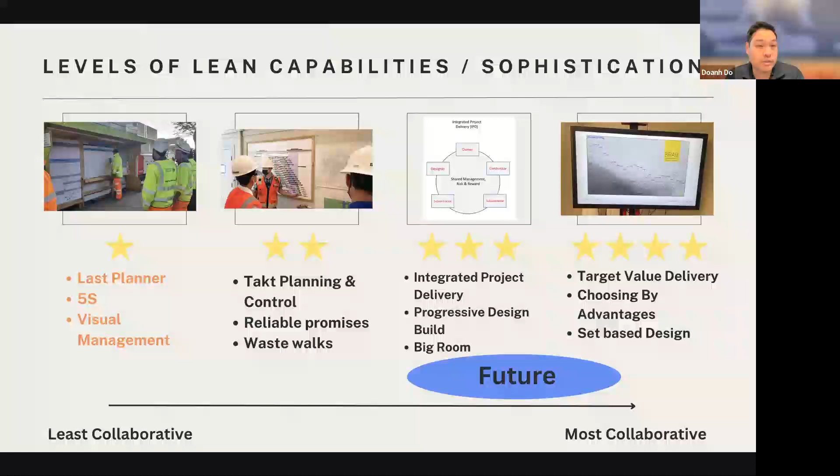And this is kind of the value of Last Planner System: bringing these areas that are not commonly used in other systems more up to the surface, and we'll talk about all these parts, right?

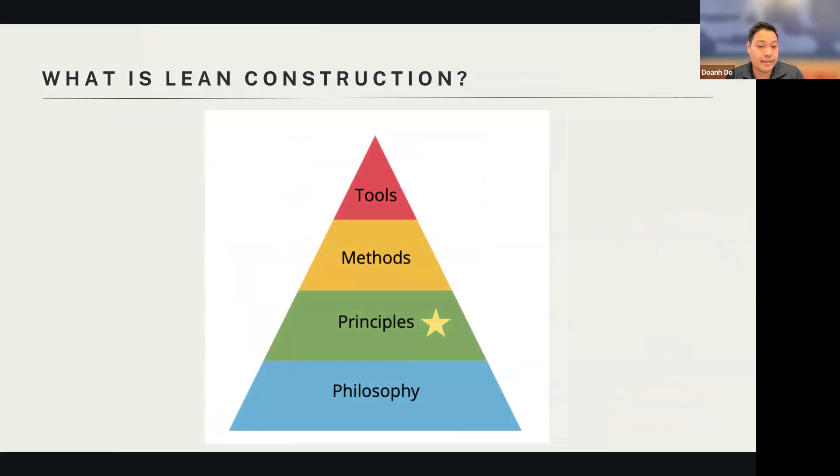So with lean construction, we really have layers, right? We have the philosophy, the principles, the methods, and the tools. Whenever I teach somebody a method or an idea about lean construction, I always start with the philosophies and principles. So today we're going to talk about the principles of the Last Planner System. From the principles, we're going to see how they connect to the methods and how we can apply this on projects.

So these are just good planning and scheduling principles. Again, I want to go over this. And the goal here is that let's see if we agree that these are ideas that we should implement on our projects. And from the agreement that we should be doing these things, this is actually how we connect them to the Last Planner System application. The first one is collaborative planning.

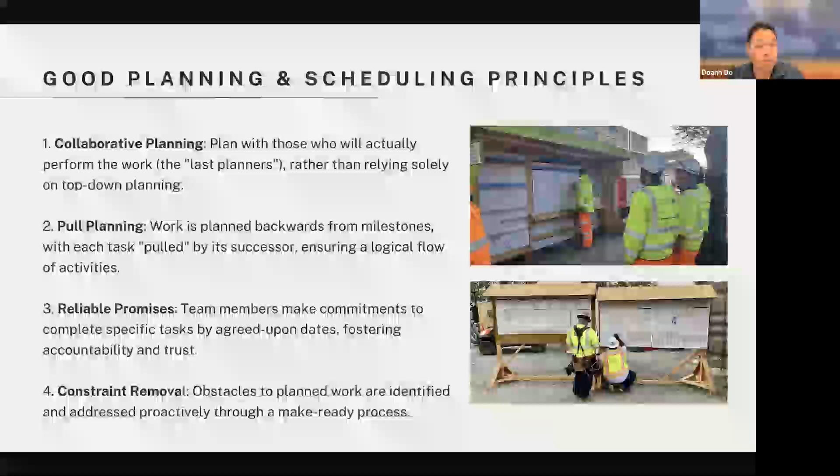Plan with those who will actually perform the work, the last planners, rather than relying solely on a top-down planning process or person. Number two, pull planning. So work is planned backwards from milestones. So we start with the milestones first, and then we pull from the milestones to create a logical set of activities. Three, reliable promises. You want your project team to make commitments to complete specific tasks by agreed upon dates, which creates a greater sense of accountability and trust.

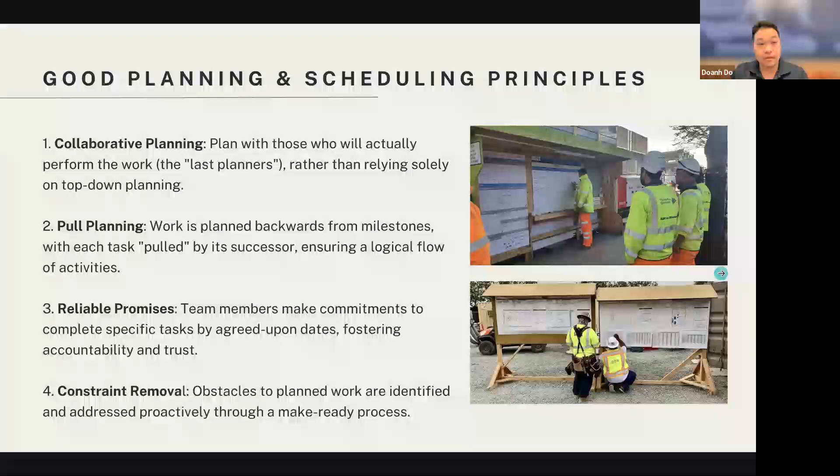Number four, constraint removal. Before you put work into the weekly work plan and the daily work plan, you want to remove obstacles for working on those tasks. So we want to address the obstacles and constraints before we put them on the weekly schedule. And this is done through a make ready process. So these are just four good planning and scheduling principles. Number five, continuous improvement. We want to get regular feedback and adapt the plan based on performance metrics and the feedback of how things are working.

Number six, we want to plan in greater detail as we approach the date that we're doing the work. So if your project task is a year away, you want to plan in less detail than if it's tomorrow or next month. So as you move close to the date of executing the work, you want to have greater details in your planning, because having a very precise plan for 2 years from now doesn't actually help you, because there will be a lot of changes between now and then.

Number seven is workflow reliability. We want to create a system that creates predictable and reliable and stable work throughout the process. By having stable work, we eliminate chaos and we make it so that people can focus on the right things. Number eight is transparency. We want to promote open communication and visibility of project progress amongst all team members. So we want to have one plan for the entire project. We don't want to have a secret plan for the general contractor, a secret plan for the trades, a secret plan for the owners. We want to have one plan, make it transparent, and communicate on that plan. Otherwise, we don't have the same information to work with each other on.

Number nine, decentralized decision making. Empower the frontline managers to make decisions about the specific work areas. Replan as necessary to adjust the plan to the realities of the unfolding future. And then finally, number 10 is that we need to understand that planning and scheduling are different things. A lot of people use the words interchangeably. And in this presentation, we will actually define what is planning, what's scheduling, and why they're different. And by having a more precise language, we actually can work better together.

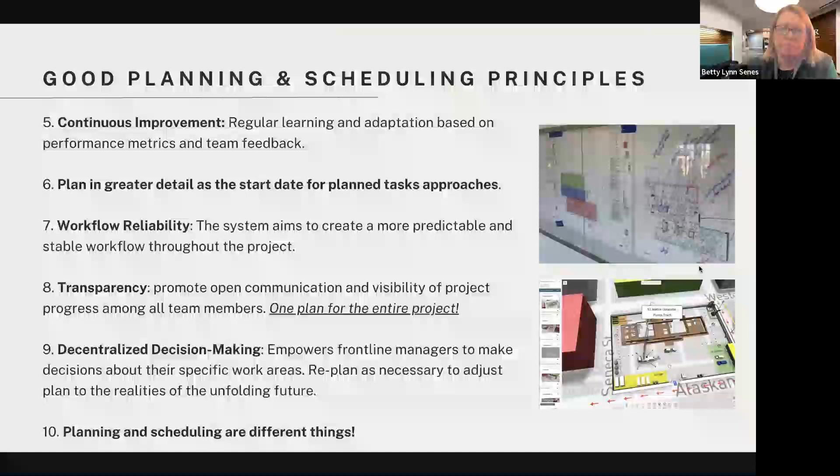So. Okay, great. And this does not require any particular project delivery method, and it does not require any level of sophistication. So all projects can use these 10 principles. And that's the goal of the Lean, is that we want to have ideas that can be used on small projects as well as large projects.

But how we apply that would change based on the project conditions, but we want to have a set of principles that we can use on all size projects.

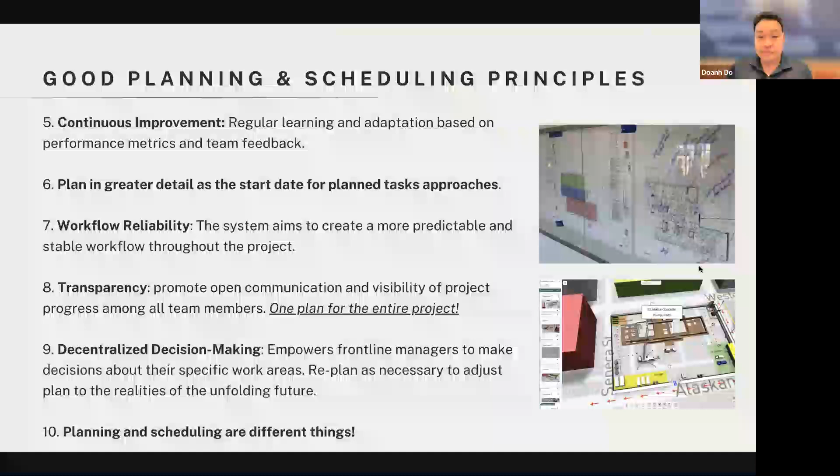So let's continue. So basically, the first important thing about Last Planner System is that we want to have the information visual. You want to make sure that you have the same information for everybody. So visual management is really about communicating who's doing what, where, and when. This allows every single person to see the work and be able to improve it. It allows us to identify risks and opportunities. And by having the information available already, we can actually have shorter meetings rather than longer meetings.

Humans are visual. We can see and process information faster when it's color-coded and visual. So just by making your information visual, you now have more people that can participate in the work. When it's not visual, there is a miscommunication in understanding what's going on. And also, people have a harder time understanding where they should be working every single day.

Logistics plan includes the site deliveries, laydown space, parking, routes that trucks take in and out of the projects. A lot of these things are on projects not visual or not even well planned. Therefore, there's chaos or miscommunication when these drivers come in and try to deliver materials. So laydown space means that you have to have space for every single crew that's working on a project, and it has to be labeled by the crew.

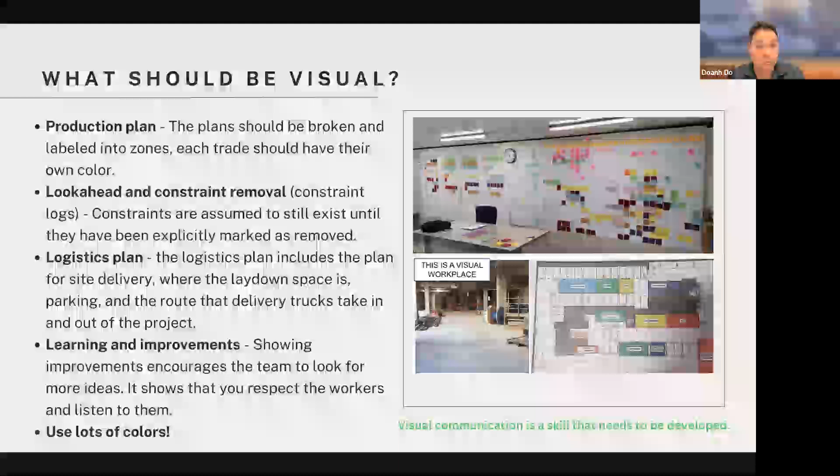We also want to make sure that the learning and improvements that we're doing is visual. So we want to show respect to the workers, that we're listening to them, and we're writing down what their ideas are and how we can implement those into projects. And we want to use colors because people like colors. And visual communication is a skill that we need to develop over time. So this is just an example of what can happen on a project. Each team will be slightly different, and we let the teams develop their own visual planning and visual communication based on how they want to use that information.

So daily huddles. So we talk about visual information and visual communication, right? That's where we keep the information about what we're working on. Daily huddles are what we do to communicate who's working on what, where, and when. So these are short 15-minute huddles in the beginning of the day. And the idea is that you want to have very focused questions, 60 to 120 seconds for each person, asking them what they're working on, where they're going to work, how many crews are going to be on site, what are their constraints, what materials are coming in, and what problems they foresee. These very short meetings allow us to have, instead of long meetings, a clear understanding about where and what's happening.

And we do the daily huddles in the exact same place where your visuals are, because you want to have all your information in a centralized location so that people clearly understand. And also you allow people in the morning to tell you about constraints and things that are coming up so that you have a plan and you are prepared for it during the day.

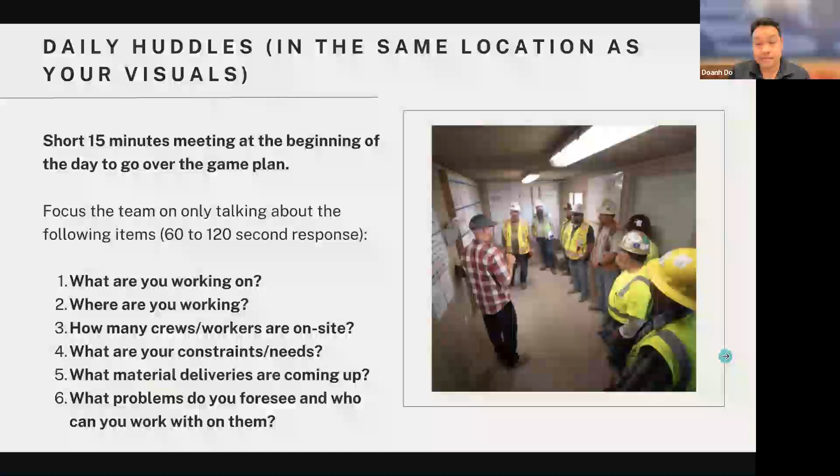Look ahead and make ready, right? So depending on the size of your projects, you'll look ahead maybe 3 weeks to 12 weeks in the future. And why do we have a look ahead? Because we want to understand what's happening and what's going to prevent us from doing the work and what's going to stop the work from being efficient and reliable. So these things could include equipment, labor, materials, prerequisite work, information, decisions, drawings, permits.

And really it's up to the superintendent and the project managers to understand what is happening in the next 3 to 12 weeks ahead of time. Otherwise, we reactively plan and we actually try to solve problems. With a look ahead and make ready process, we're proactively looking to the future and making sure that we are putting the things that we need in place before the work takes place.

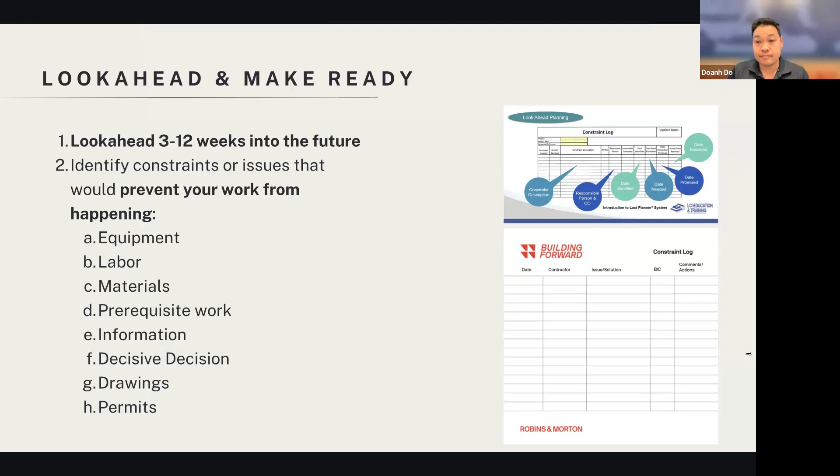Percent plan complete. So as we are putting the work that we're gonna do next week onto our production plan and schedule, we want to know, are we actually accomplishing what we're planning? And how many tasks we're planning versus how many we're completing? That gives us our PPC. In general, we want to have 100% PPC because we want to have reliable work. And nothing should be put on the weekly work plan until the constraint has been removed.

And when there is a low PPC or there's an issue with the work, we want to understand why it happens. So Glenn Ballard, when he first started studying last planner system, he looked at PPC and he found out that PPC is correlated with the productivity of projects. And on average, most projects actually have a PPC of about 54%. So you go to any random project throughout the world, your PPC on average is actually 54%.

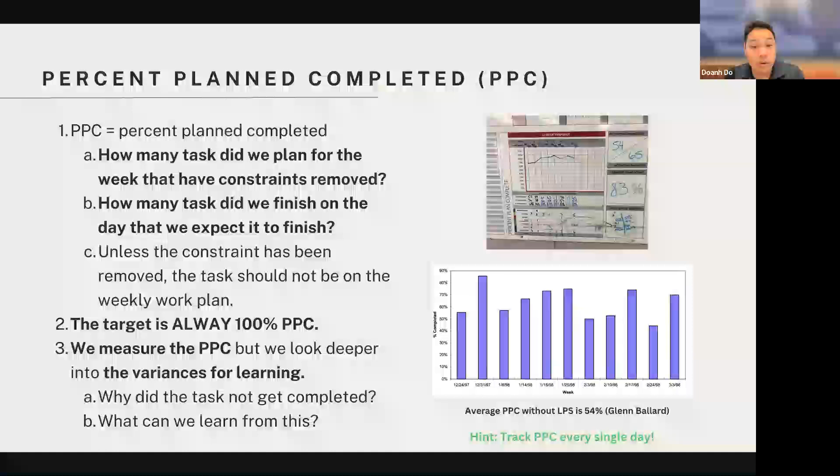And as we increase PPC, we improve productivity, we improve flow of the work, and we actually get higher safety. So the target of PPC is always 100%. We don't always hit 100%, but our target is always 100%.

And then, so basically now we kind of have a better understanding. This is our first pass of understanding the last planner system. So I presented some ideas, right? Visual management. I presented daily huddles, make ready process, and PPC. That's the very basic foundation of last planner system.

And now that we have this general understanding, we're gonna actually go deeper in our second pass of last planner system. Before we continue, I want to open up for you guys to ask some questions about what we presented so far. Are there any questions or clarification you want on the material so far?

It seems like sometimes it's really good to have a coach. Does every project need a coach? I would say that yes and no. So if you have a project that's less than $100 million, I think that the superintendent and the project managers should be coached through the corporation. So you should have your internal coach that coaches all the major supers and project managers to understand how to apply this.

But when your project is, let's say, 100 million to several billion dollars, I would say that you should have an external coach, or the coach should come from either the construction management company, the owner, or the general contractor, just to make sure that the team understands how to do this. Because even if you educate the team on last planner system, it's very rare that somebody would have the discipline to put all this together. And also they don't have the context to understand how well they're doing things.

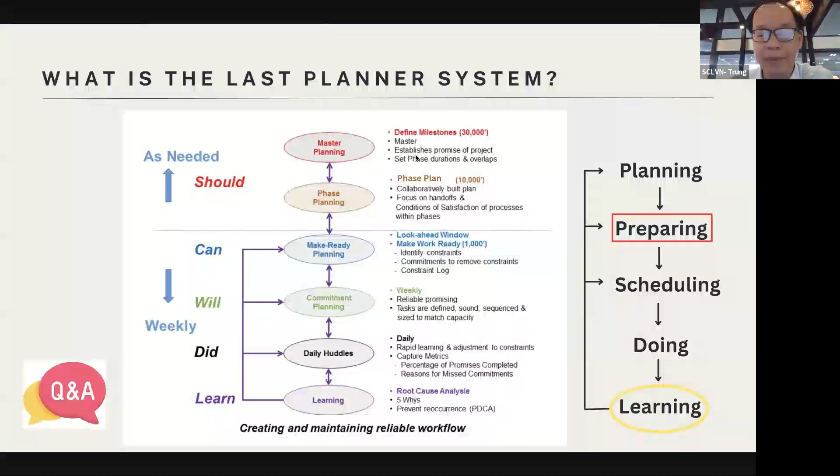Excuse me, Trung? So from me, I just wonder whether the visual management approach is only for last planner, or do other lean techniques also have that same concept? Yes, so visual management is a way to communicate information. Planning and scheduling with last planner system is one of the pieces of information that you're going to have visual. So all the other methods require visual management, whether we're looking at target value delivery, choosing by advantages, or even our clash detections. We want to have visual indicators about what's happening.

So every lean method is built based upon visual communication of information. So it's not just Last Planner System, but today we're talking about Last Planner System. So we're using it to connect it together, but you should have your key decisions visual. You should have your learning visual, your planning and scheduling visual, your production planning visual, and your costs over time visual, and even your BIM tracking and the issue log visual.

So a lot more things can be visual, because when we're working on a project with more than 100 people, what I found out is that if you require someone to log into a software to find information, most people will not be able to log in. So when you have more than 100 people, we just want to have the information up there for everybody to see.

And we have to consciously update that information every week or every month, depending on what information we have. So the most important thing about information is it has to be up to date. So you have to have a cadence of updating the information weekly or bi-weekly or monthly. But that's a very good comment.

Okay, so this is the master planning, and this is at the very top of the process. So you're working on a new project. I would start with master planning, but if you're working on a project that's already running, you may start with look aheads and you may start with daily huddles. But this is for a project that's brand new. You start with master planning, right? So master planning, what we want to do is have a high level understanding of what the project is going to look like from the beginning to the end.

And simply what we do is we talk to the stakeholders and say, what are our key milestones? And we put those in red, in the diamonds in red. So those are key milestones. On a project that's long, you can have between 5 and 10 to 15 milestones. And those milestones in between are going to have more work. We want to understand what are the key milestones and handoffs to know how we're performing throughout the project, right? So those are going to be in red.

Milestones are typically not going to be moved unless the stakeholders allow you to move it. So milestones are fixed unless the stakeholders allow you to move, because moving the milestones is actually very, very important. We generally don't want to move it unless there's an agreement to move it. Milestones will all be moved eventually, because you planning years in the future doesn't guarantee that it's going to happen that way. They will be moved, but you have to move them based on the customer.

From your milestones, you want to collaboratively plan within the milestones. So this is where your pull planning will take place in between your milestones, and you're planning backwards from the end of your milestones, from one milestone to the beginning of the other milestone.

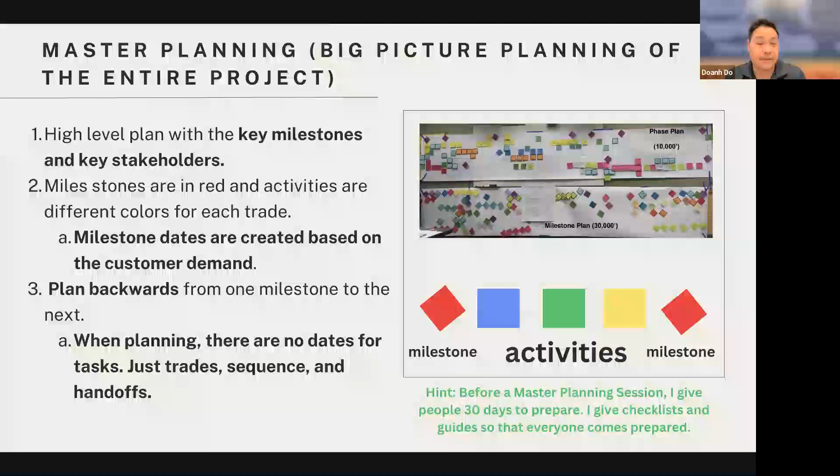So a lot of teams end up wasting time because they do not give people enough time to have an understanding about what's within the milestones and come prepared. So phase planning and pull planning, right? These happen in between the milestones.

So after you determine the milestones and you have a general understanding of what's happening inside of it, you want to have a detailed phase planning. And these are typically done for 2 to 4 months at a time. And again, same rules apply, right? You want to give people about 30 days to prepare. Give them checklists, give them guides, make sure they all understand who's involved and what the work would look like in that milestone. This is more detailed than milestone planning, and we still work backwards.

Why do we work backwards? Because when we plan forward, it's very easy for us to miss a step or miss a constraint or miss a logic. We plan backwards because backwards planning allows us to really logically understand all the things that take place. And the goal of the phase planning is that we're going to first plan and then we're going to schedule. So this is the difference between a plan and a schedule, right?

A plan includes the trade, the task, the handoff, and the sequence. So we want people to talk about that first before you even talk about crew sizes, duration, and dates, because the last 3 are more detailed. So we want to first talk about the first 4 and then add in more details if we need to add in those details at that meeting.

The next part is look ahead and make ready. We talked about this previously. We want to have a 3 to 12 week look ahead in the future because we want to identify constraints that stop us from being able to do the work. And one of the hints that I have for most teams is that you have to have 1 or 2 meetings just for look ahead and make ready every week. At least 1 or 2 meetings, even if it's a small project. And you have to talk to each trade about what they're working on in the future and what constraints are occurring for them.

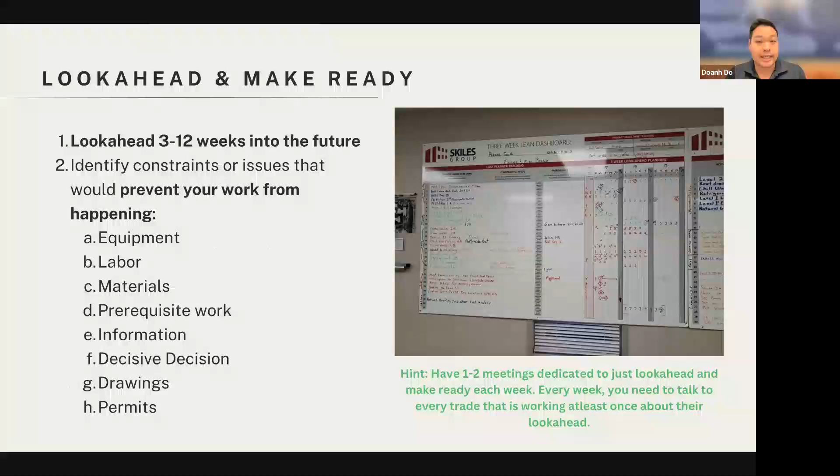So weekly schedule, right? We move from planning to schedule because the difference between planning and schedule is that planning does not have the look ahead. Once you have the look ahead, then you're actually at scheduling. So here we're at a weekly schedule. This is the detailed schedule about what each trade is doing, including the task, duration, handoffs, and conditions of satisfaction. And you want your tasks to be assigned by trade and by day, so the trades understand what they're doing and make sure that they have made ready their work before they put it into the weekly schedule.

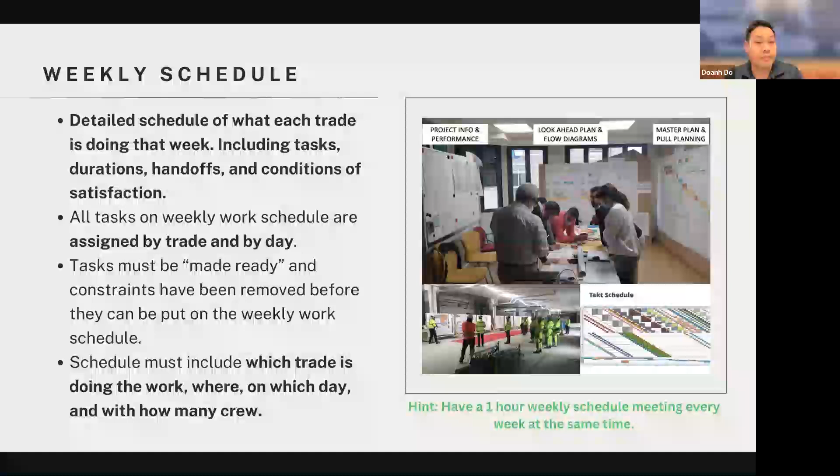And the schedule includes which trade is doing the work, where, on which day, and how many crews they're gonna have. So typically we recommend that a team has at least an hour weekly scheduling meeting just to make sure that people understand the weekly schedule. And during the daily huddles, you're talking about the weekly schedule and the daily schedule. So from the weekly schedule, you have the daily schedule.

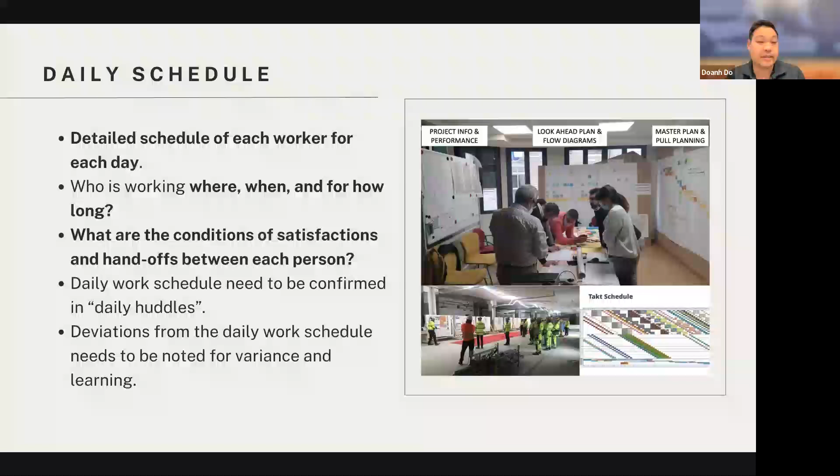Daily schedule includes each worker. So now we're in more detail. Each worker, where they're working, when they're working, how long they're working, what's the conditions of satisfaction between the handoffs of one worker to another worker. We confirm all these during the daily huddles. And then when there's deviation or learning, we talk about this at the end of the day or in the beginning of the day, depending on your project.

And then visuals, right? So same thing. Visual management is where your daily huddles are. You keep your daily huddles short because the information that you're asking for is the same information, and everybody's trained to answer the standard set of questions.

I want to keep it 15 minutes because if you take too long, people don't want to do it. And most projects, they do a morning huddle, 15 minutes. They do an afternoon huddle, 15 minutes. And usually they do both because they're asking for different things. The morning huddle is what are you going to work on? Where are you going to work?

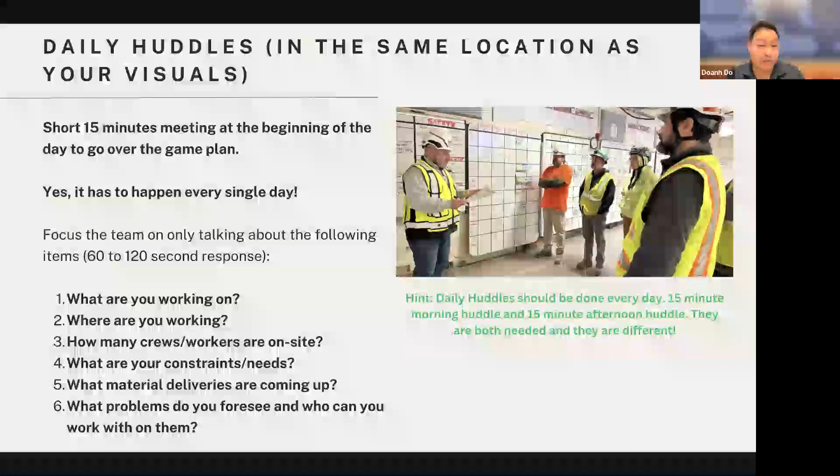What's happening? The afternoon huddle is like what happened that day. Because if you wait until the next day to ask them what happened, they forgot. And you want to capture that information so when they go home, they don't have to think about the work anymore. So that's the last planner system component, right?

So now we have a strong sense of all the pieces: master planning, phase planning, make ready, commitment planning, daily huddles, learning. And we see that you have to put all these together because if you don't put them together, they don't work because you're missing one piece. The system doesn't actually operate. And you have to understand exactly what you're doing for every meeting.

So when you're doing a master planning session, your calendar invite has to say master planning session. And if you're doing a phase planning session, your calendar invite has to say phase planning session. And you also have to include what milestones you're planning that phase in between, who's involved, and what preparation they have to have before they meet, and also a video about what a phase planning looks like. So we're giving people a lot of information so they know what they're preparing and they send the right person.

Because the worst thing that happens is that you have a phase planning meeting and one of the trade partners sends the wrong person. That person does not have the ability to understand what the work is like. They can't make the commitments. They don't understand the scope of work. They're just sent there because their boss needed somebody to attend the meeting. So these things actually lead to inefficient projects.

So what we're trying to do is take all these components of the last planner system, break them into smaller meetings, and have those be very focused on a project. And over time, the team knows what the meetings are for and why they're doing it. So it's very easy for the teams to efficiently apply this. So you look at a project that's doing last planner system, right?

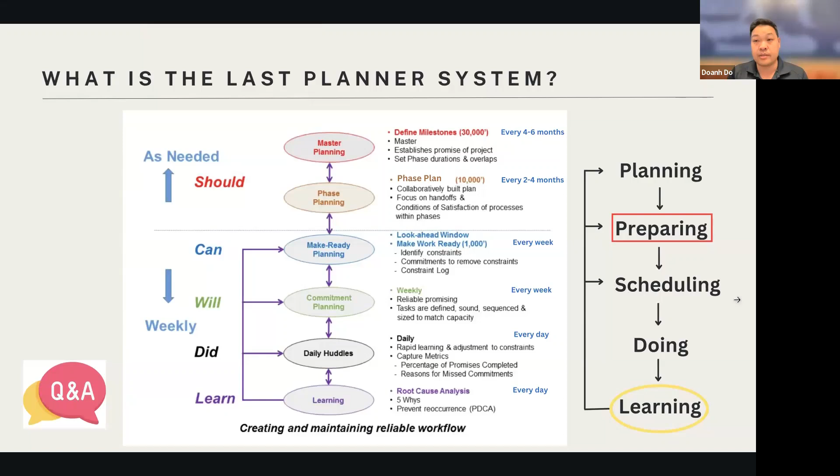So we did talk about this earlier, but there is a distinction between planning and scheduling, right? And really the distinction here is that planning is master planning and phase planning. There are no dates for activities, just trade sequences and handoffs. And the only dates that we have are going to be the milestone dates. Before we move it to scheduling, we have to do a look ahead and a make ready process. And the scheduling includes crew sizes, duration, and dates. So you can't schedule until you remove all your constraints.

And we also want to communicate the difference between planning and scheduling, because this allows us to really have a precise language. When you tell me it's on the schedule, that means you're telling me that you already did the look ahead and your constraint removal. If you tell me that you're planning, it tells me that you've done only the trade sequences and handoffs. Because if you don't communicate this well with the team, they will have a misunderstanding, and also it's hard to understand how far along the activities are in terms of the planning and scheduling.

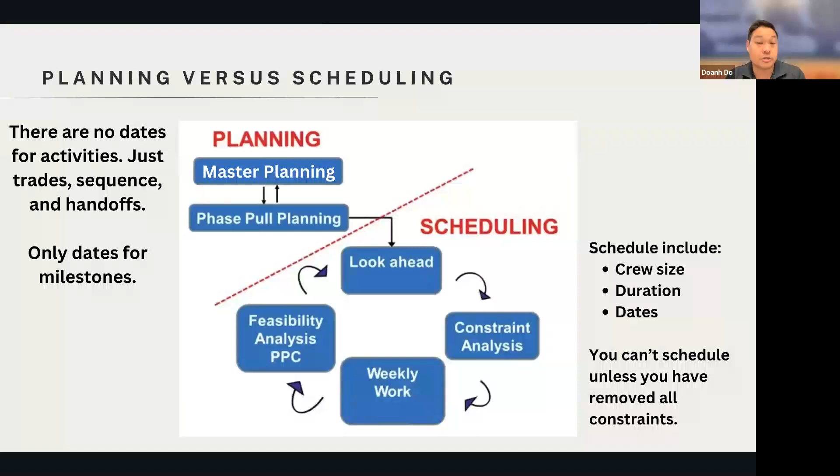So these are some common mistakes from a pull planning session. So can you spot the mistake? A lot of teams do not understand the distinction between planning and scheduling. So they just mash it together, just put it all at the same time. So they use these boards with the dates, and they start to plan and schedule at the same time, assuming that pull planning and scheduling are the same things.

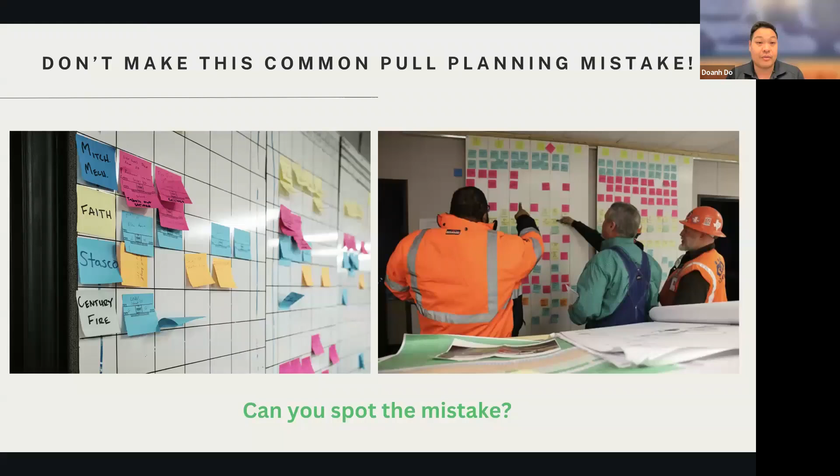And in doing so, it's not clear about the level of clarity of the activities, and it's not clear about the level of commitment that the team has about this, right? So we want to separate them. So really, you want to do this instead, right? You want to separate planning, scheduling, and communicating, because these are different meetings and these are different activities.

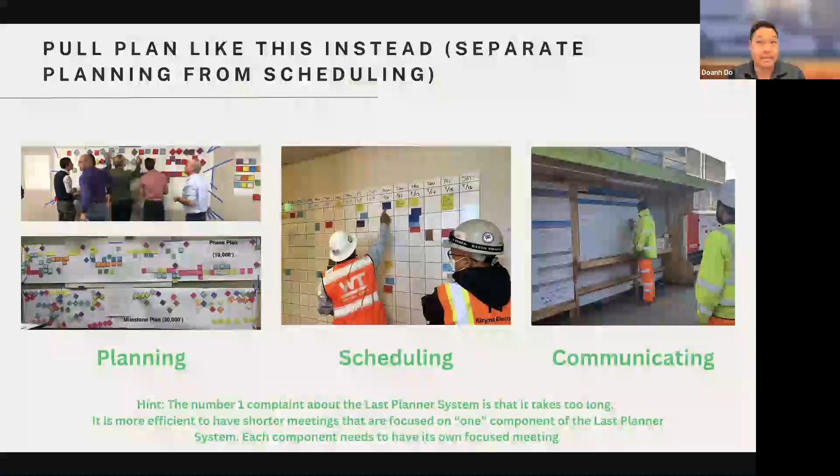And the number one complaint that I see from people with the Last Planner System is that it takes too long to do the meetings, or takes too long to do the pull planning session. People say, I don't have 4 hours or 8 hours to do pull planning. It only takes you so long because you're not separating them into the very precise and concise meetings that they are. You should not have a 4-hour pull planning session. It should be like an hour, because you have to understand what milestones you're working within, who's working, and the people should be coming prepared before they even start the work.

And at the heart of the Last Planner System is reliable promises and better communication, right? You want to encourage people to have the right conversations. Once you have the system running, people start to ask and talk, make requests, make promises, and really understand that at the end of the day, projects are based on people working together. So people are making promises and requests to each other, and this allows them to work together. This is a network of commitments.

And verbal communication is also a skill that we need to develop. So we first want to develop visual communication, and then planning skills, and then verbal communication. So over time, we're looking at this not just as, do we have these pieces in place first? And then what's the quality of the conversations, the planning, the visual communication, the reliable promises that we're having with the team? So we look at quantity first, just to make sure that we actually have what we're missing in the system. And then we focus on the quality of our conversations and the quality of things that we're working on.

So the way that I see this is that planning is actually more social than people realize, because the person who does the work has to be the one that makes the promise. Because if you put it on the plan or the schedule, but the person doesn't commit to it, it doesn't happen. And people always ask me, okay, if I have people plan the work, how do I know that it's optimal, as opposed to me planning by myself? And my answer is very simple. You have people plan the work, and it's visually communicated, and I understand what's going on, I can ask questions. As long as I can ask questions, I can ensure that it's optimal.

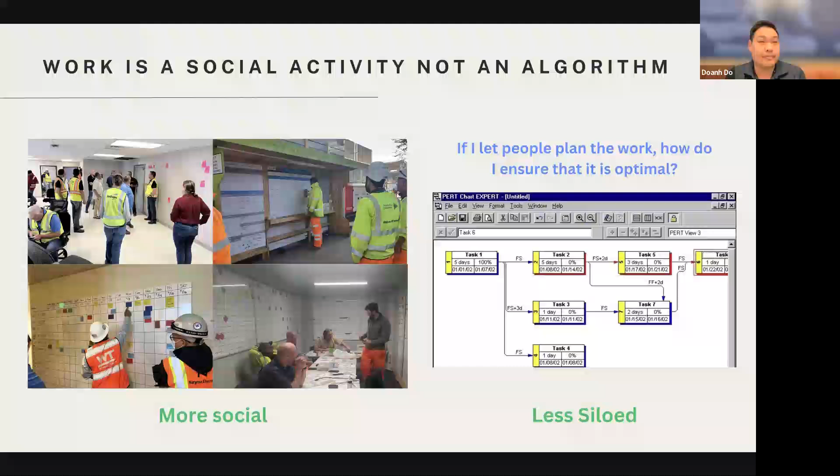It's a social problem. Once you have people working on a project plan together, and you can start talking about the right things and important things, then you will actually improve the plan over time. And that's what we're trying to do, right? We want to have a plan that we understand and people can do. And then we improve it over time. Because CPM doesn't have these social components to it. So your plan is imaginary, and it may not actually happen that way.

So why do you want to use the Last Planner System? Higher productivity, less waste, more reliable schedules. You get safer projects, better morale and higher engagement, and you get better customer satisfaction because you're actually aligning how you're doing the work and when you're doing the work with your client's goals, milestones, and objectives. And where can you use it? You can use it in the design phase. So a lot of times teams are using this to manage how they're working together on design phases and design milestones and permitting.

You can use it for construction. You can use it for general project management. It doesn't even have to be a construction project. It could be software engineering. And I would say that anytime you have more than 2 people working together, you should use the last planner system.

If you have 2 people working together, you can just make commitments, and you can talk about what you're doing as commitments. But when you have 3 or more people, then you need to make the information more visual, and you need to work together to identify the work that's taking place ahead of time.

And what should you focus on to be successful? I would focus on reliable handoffs between the trades, the flow in between the work, communication, so making sure that people understand how to make promises and how to keep promises. I would focus on how to display the information, because if you can't see it or understand it, I don't think anyone else can see it and understand it.

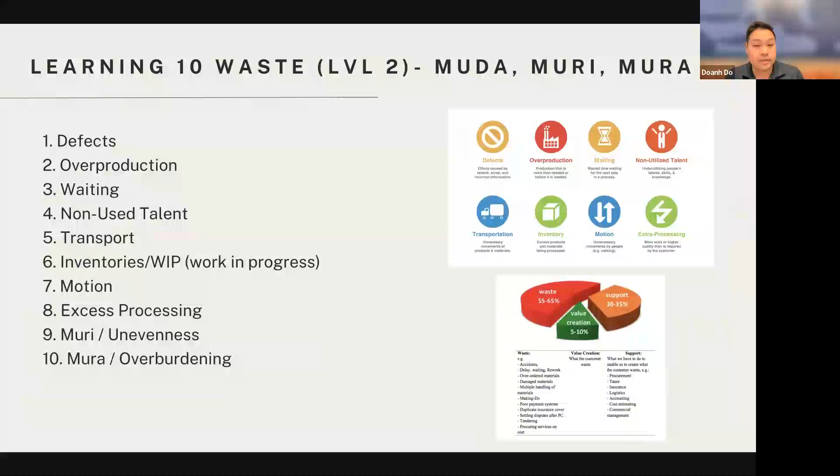Level 2 also includes understanding and implementing the 10 wastes. So the wastes are the 8 wastes, Muda, Muri, and Mura. And the goal of this process is to identify the wastes in conjunction with your video studies. And again, we don't teach the 8 wastes or 10 wastes until we teach last planner system, because in design construction projects, planning and scheduling is the backbone of your project. That's the most important thing, because everything else is built around your planning and scheduling.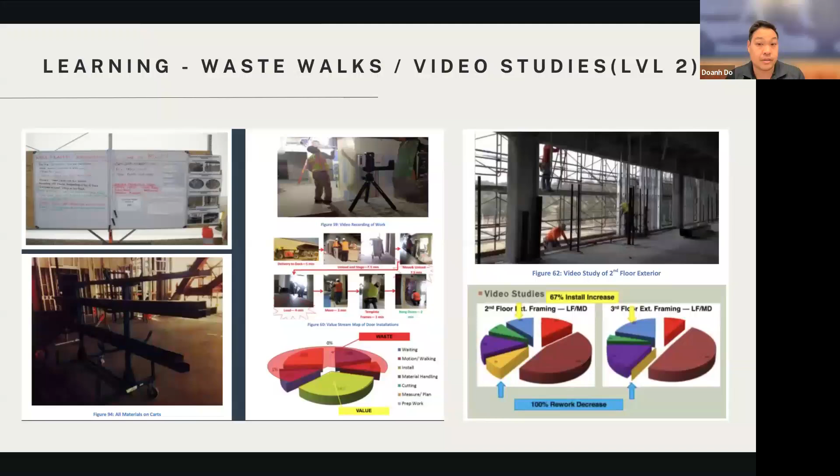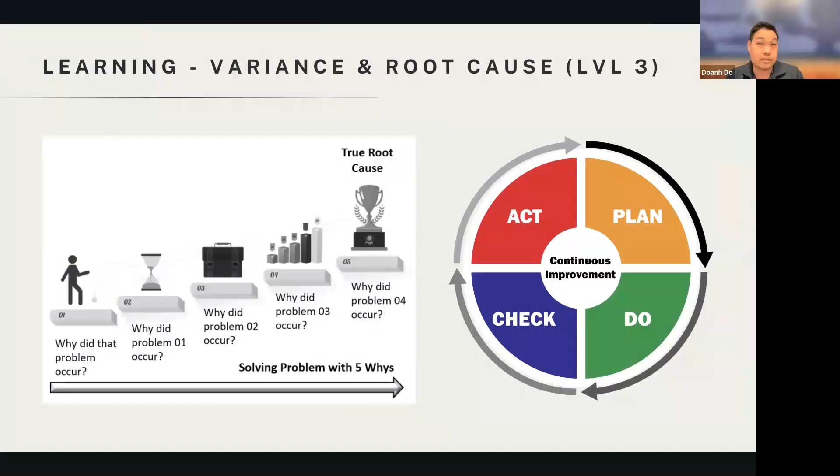And then level 3 is where you look into the root cause analysis. When something does not occur, you want to ask why. So this is where we're starting to teach plan, do, check, act. We're trying to teach people to do root cause analysis, the 5 whys. These are all very, very important techniques for understanding the root cause of how things are. So this is level 3 in terms of learning. So the teams generally start with level 1, and then we graduate them onto level 2 and level 3.

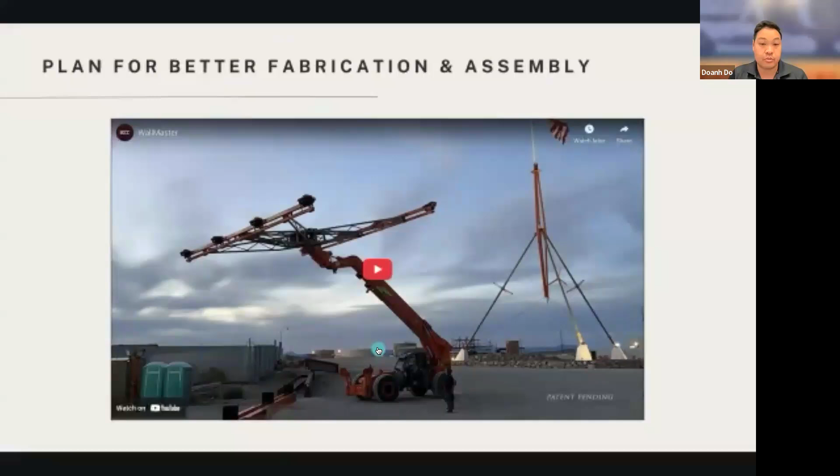And then some people say, okay, I work solo as a trade. I'm doing a mechanical trade, electrical trade. I'm doing a drywall trade. Can I apply last planner system for myself? The answer is absolutely. So we're gonna watch a video from BZI. BZI is a steel erector company out in Utah, and they're very successful. And they use last planner system for their projects. So let's watch this video together.

Do you hear the audio?

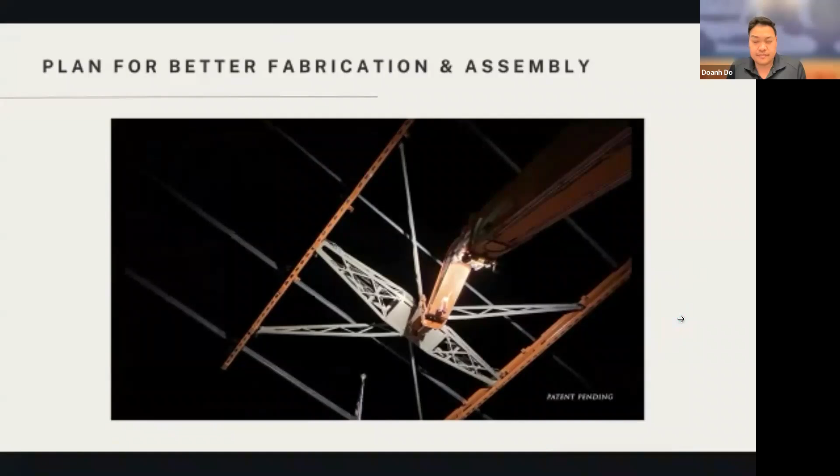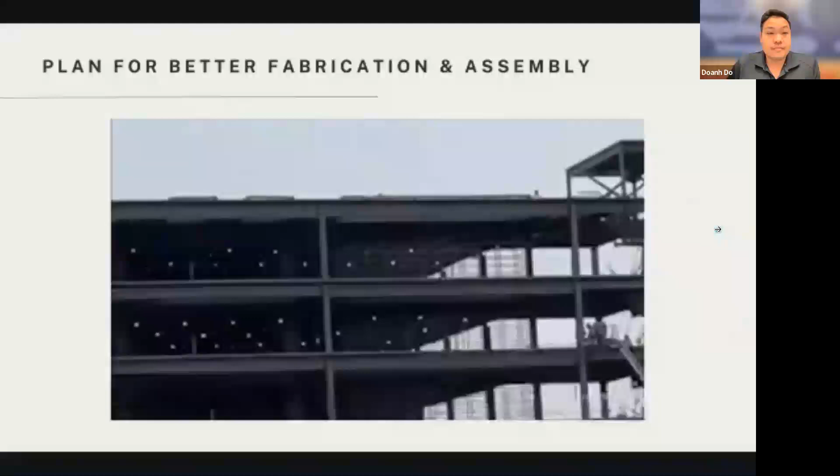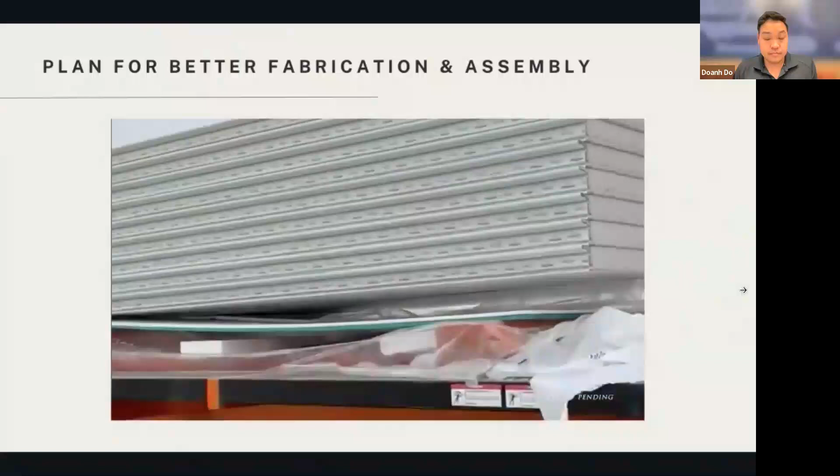With the construction of taller, multi-level warehouse and distribution centers, material selection has shifted from concrete, precast, and tilt wall products to insulated metal panels, or IMPs. Current IMP installation methods present schedule challenges for concurrent and following trades because access to work zones is not available until that portion of the IMP scope is complete.

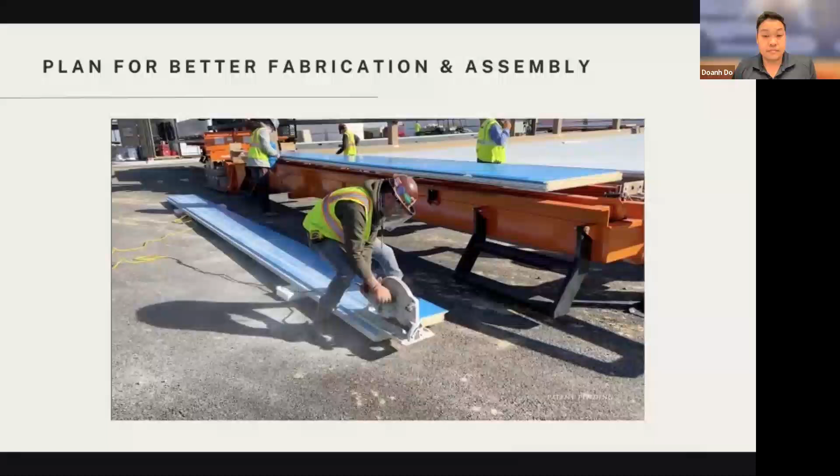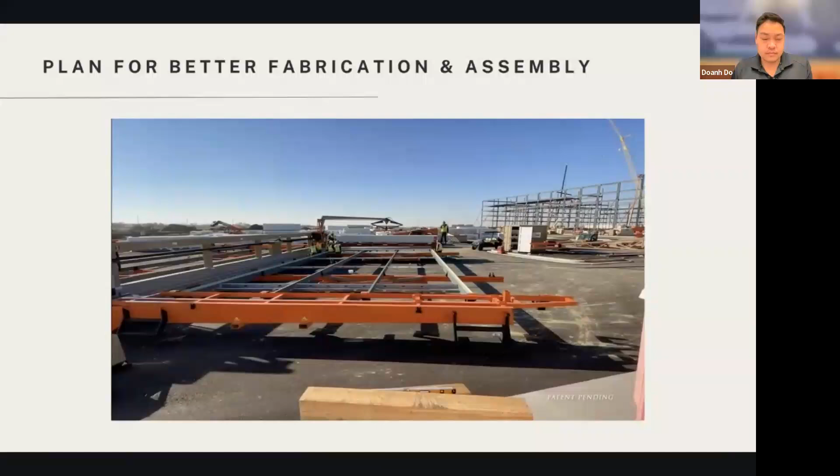Our new IMP installation system is a revolutionary process designed to enhance safety, efficiency, and simplicity in assembling and installing IMP walls. Building on our patented panelization technology, a complete IMP wall module can now be assembled at ground level and installed in a way that improves schedule and construction sequencing.

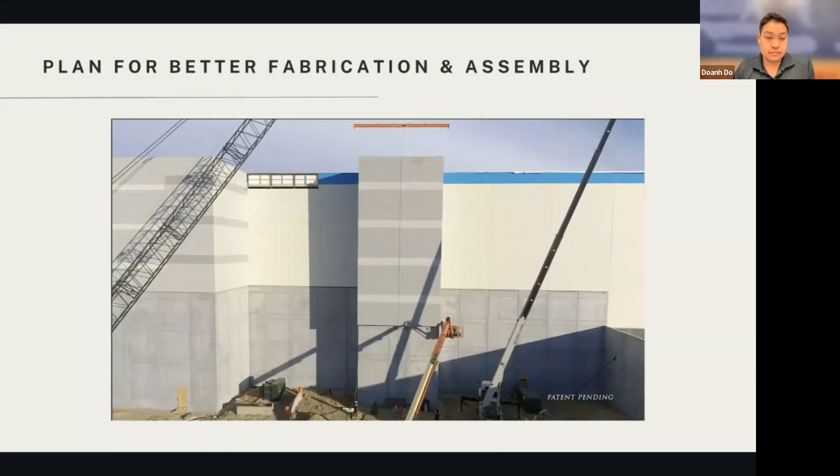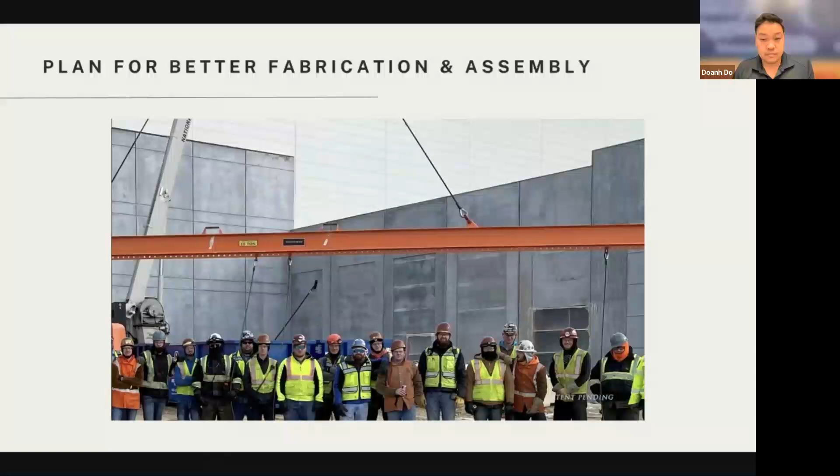The IMP system consists of a panel table, a material lift arm, and gantry, as well as high lift panel jacks that elevate the panel to 11 feet. Other specialized accessories include the IMP bunk handling attachment for the forklift, spreader bar for the crane, and finally, the wall master.

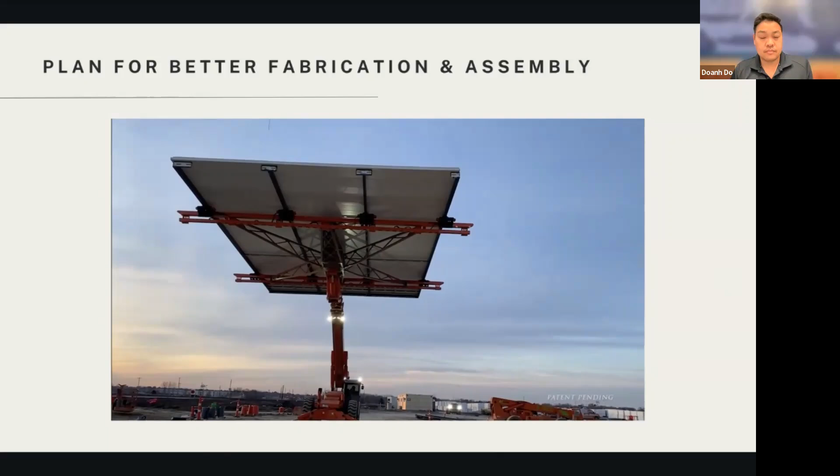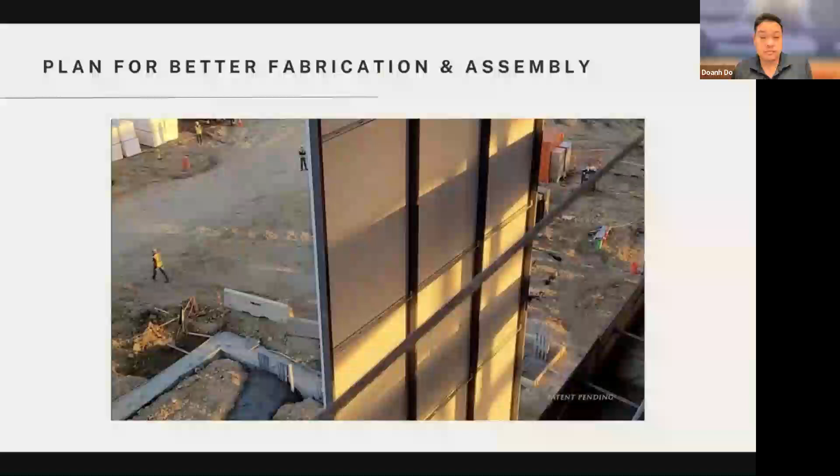Construction of an IMP wall module begins long before material delivery or other activities happen on site. To enable this system, our teams work closely with the project engineer. A steel tube substructure that supports the insulated metal panels is engineered, as well as the connections needed. IMP lengths are detailed to meet specific wall section designs.

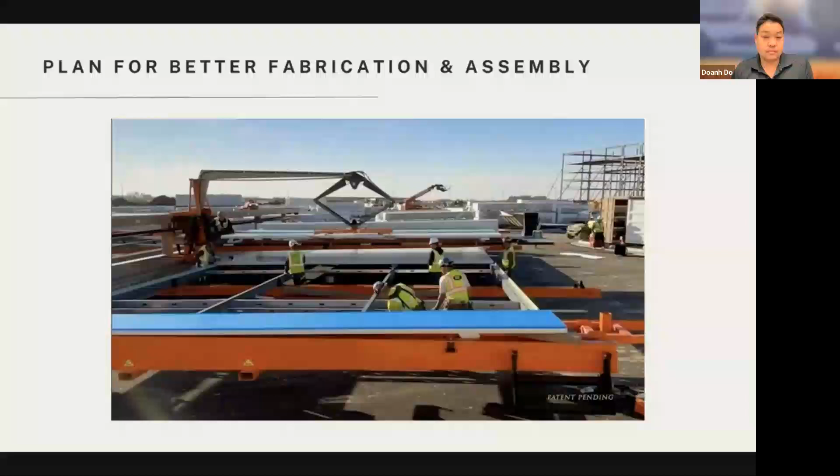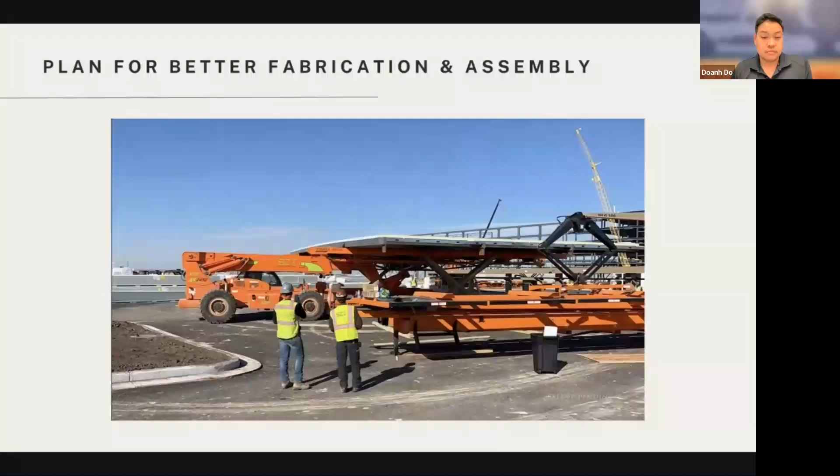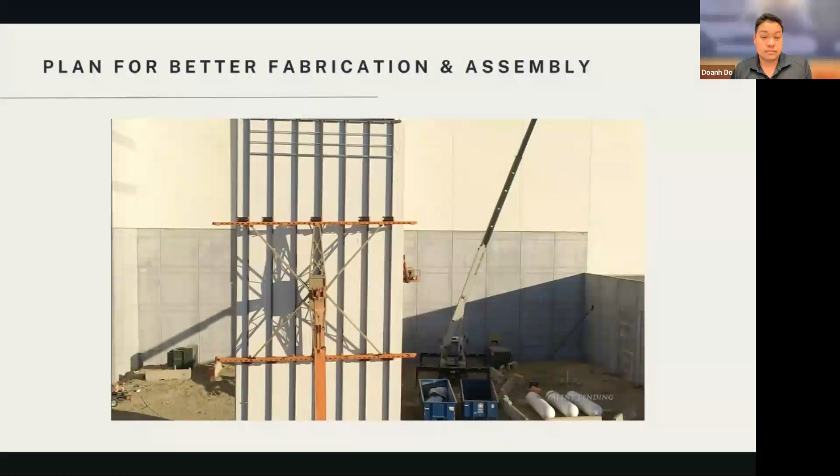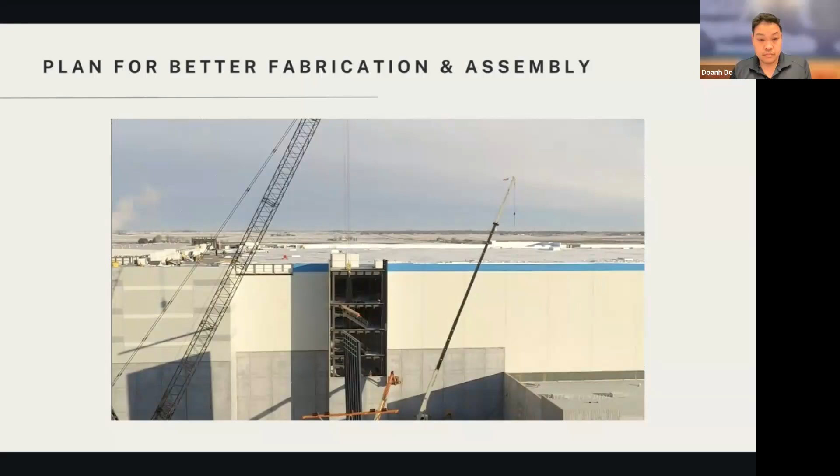On site, a moving gantry at the panel table supports the IMP material, allowing the lift arm to set each panel into place in an efficient and safe manner. The panel jacks then raise the completed module to provide access for the wall master to connect beneath. After being transported to the crane's position, the wall master rotates and tilts the module to hand off the wall section to the crane. Team members make the final connections to the building once the module is lifted to its final position.

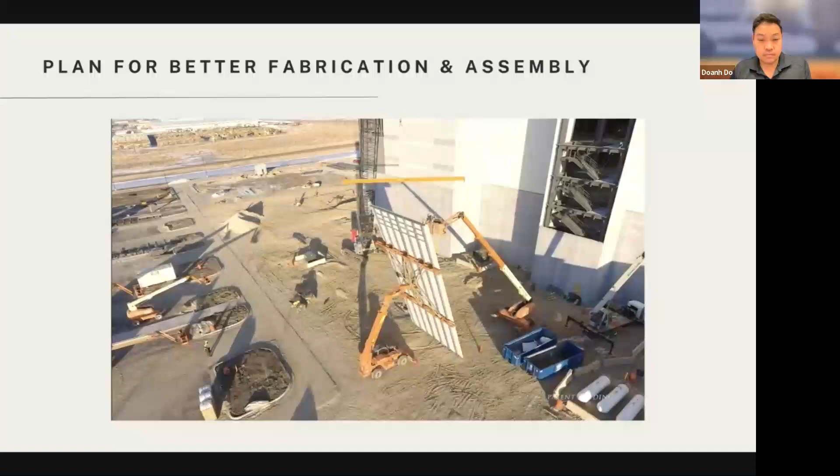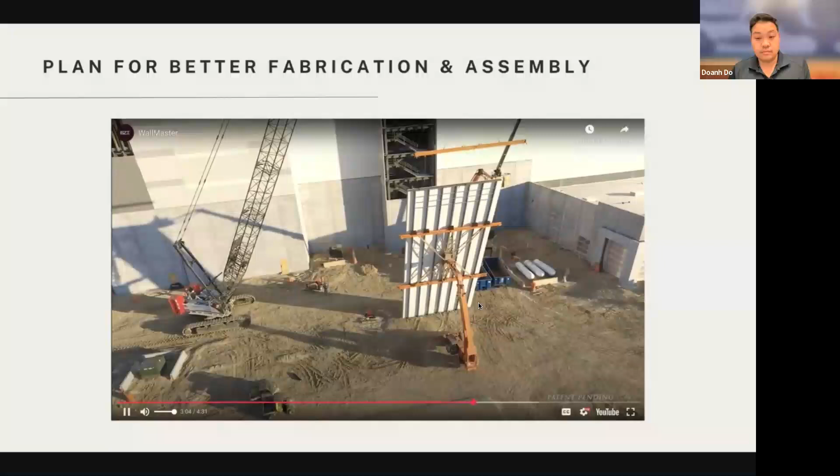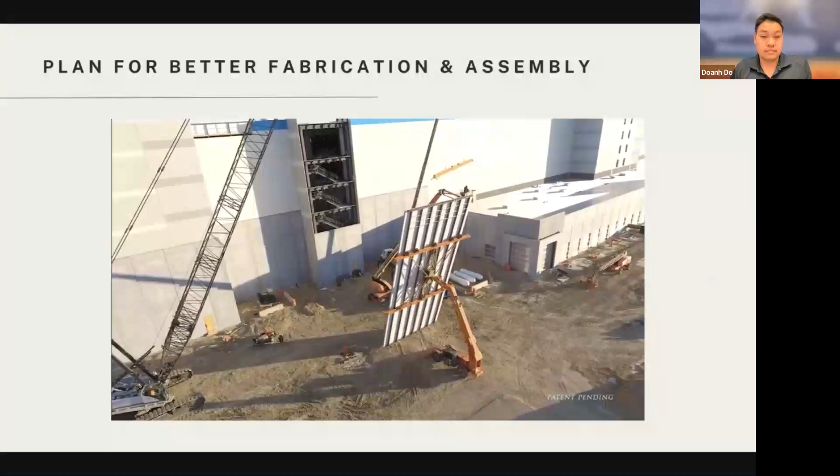Advantages in using this new process are evident, but to touch on a few of the most important points, we begin with safety. Bringing the wall assemblies to ground level drastically reduces aerial time on the project. The ironworker team benefits as many of the steel components that support the IMP at the building perimeter are incorporated into the panel substructure. The IMP team benefits by completing their work at ground level. Materials can be safely handled and installed in a controlled and ergonomic manner, reducing fatigue and other injury risks.

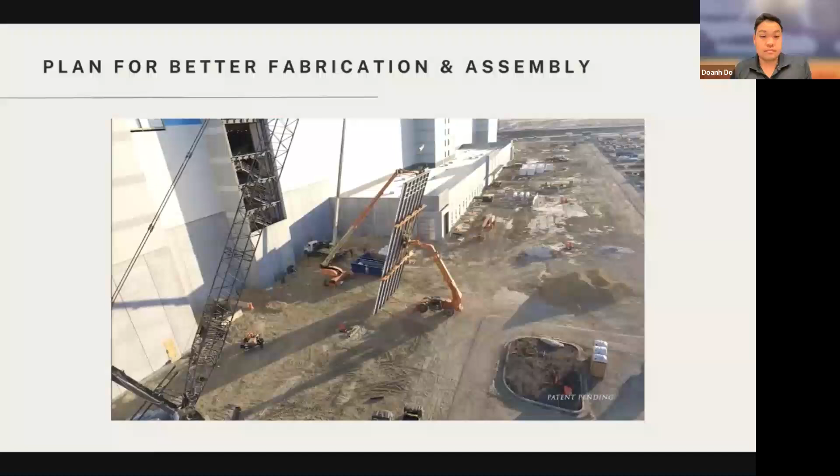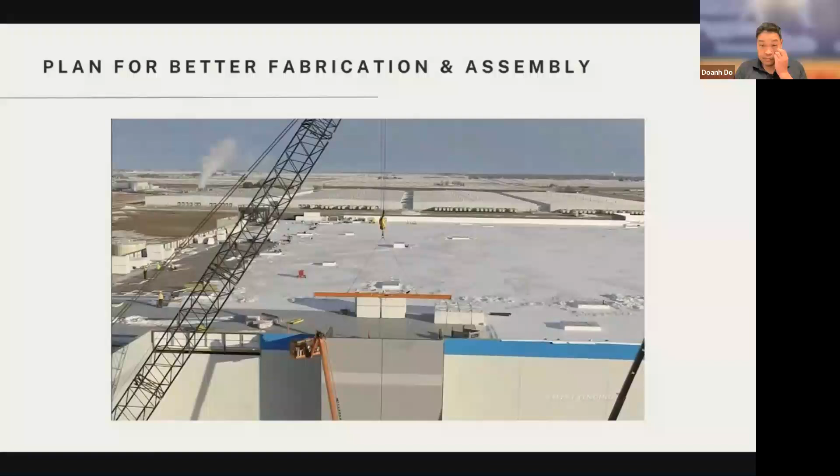Efficiency gains through more productive workflow translate into shorter durations for the overall IMP scope, and closing the building perimeter faster. Another schedule advantage can be gained in site logistics, as most of the assemblies can be completed away from the building perimeter, improving access for multiple trades and optimizing material staging.

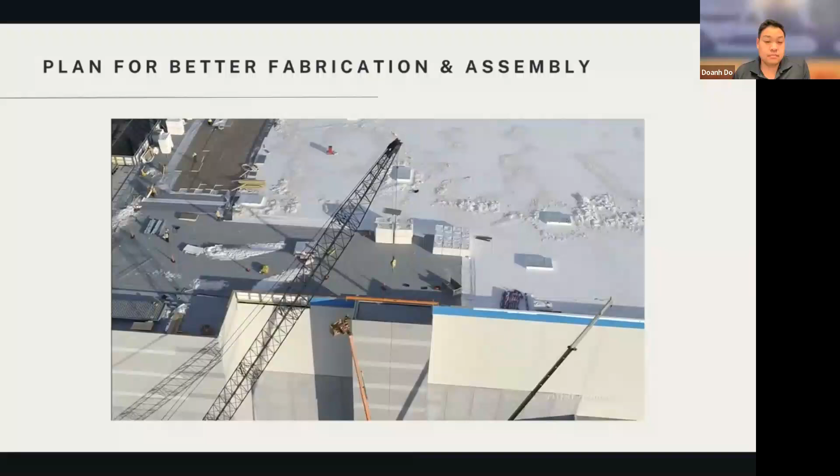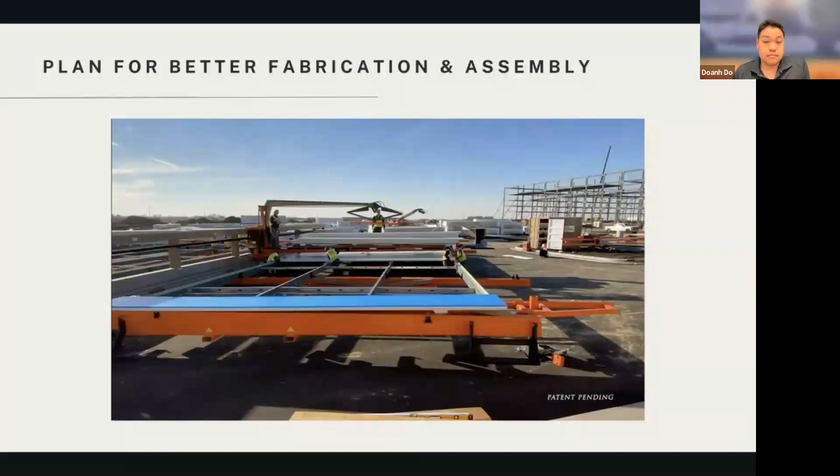And finally, our panelization process contributes to a more simplified perimeter wall system design, removing complex parapet assemblies and wall girts that often affect multiple finishing scopes and present sequencing challenges throughout the construction process. Safety, efficiency, and simplicity.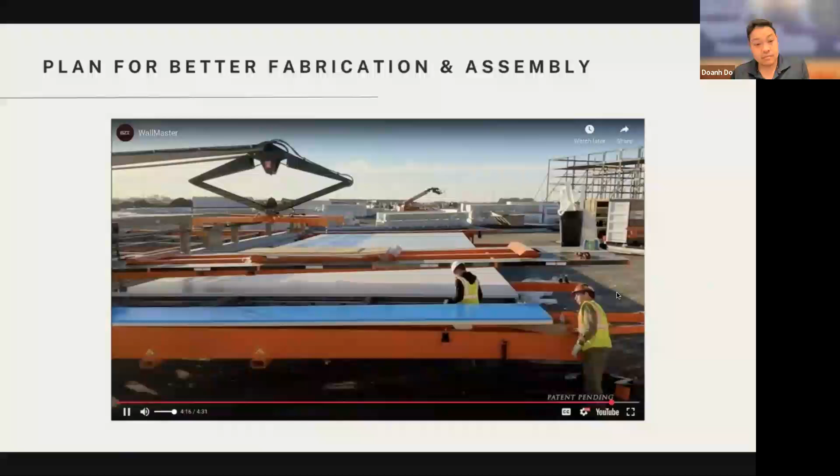So as you can see, there is a way to use this internally. Even if the general contractor or the owner isn't involved in the Last Planner process, you can apply it within your own company. So today was an introduction, right? This is really the executive education of the Last Planner System. But as you apply more of this, there are going to be topics that we don't cover today that you may need to look into. I just want to put the list here for you to be aware of.

Because the first thing we want to do is make sure that the teams are applying these components, getting to level 3 learning. And then they want to look into all these other topics, like language action perspective. What is the actual reliable promise? There's a whole body of language and knowledge about how to make promises and work on teams with promises. Once you start to understand language action perspective more, you see that it's actually committing to promises rather than activities or tasks. In the beginning, people were still thinking about activities and tasks, but over long enough time of applying the Last Planner System, they start to understand that it's actually about making promises and keeping promises.

You're also going to see how you can integrate Last Planner with Scrum and Takt. All three are complementary and they work together. And you've got to understand where to use them and how to use them together to create one plan for the project. As you get better, you're going to learn how to do Last Planner in design. Again, this requires more experience, but there are a lot of benefits to planning your design process and making sure that your teams are producing what you need to have for your permits.

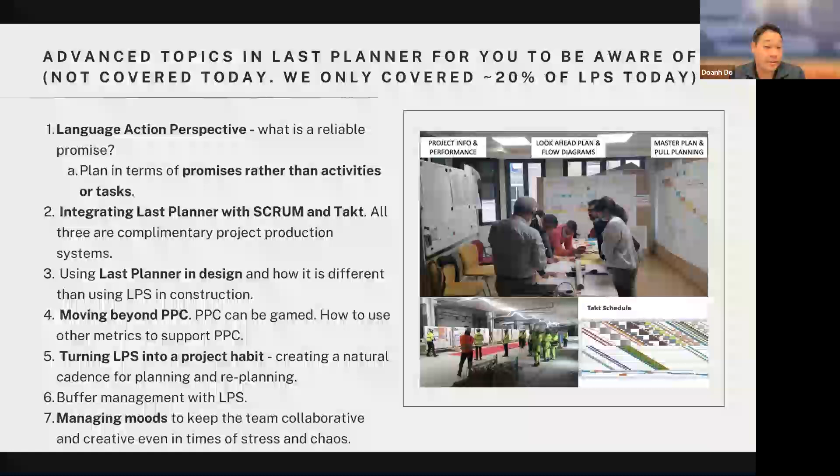And over time, you're going to learn that you can identify how people are thinking about the project and the plan based on the moods. And one of your jobs is really to ensure that they're having a positive mood and a collaborative mood. So even when the times are stressful or chaotic, they're still working together and seeing a positive future for the project. Because as soon as people have negative moods or see that there's going to be a bad future for the project, they're not going to work together. So moods and buffers is really how you ensure that the project is reliable, even when something goes wrong.

And the way that I see last planner is that, yes, it's a series of steps, but longer term it's not actually a series of components or things you put into place, right? It's not a checklist. It's a set of skills that you need to develop and get better at. So visual management is a skill. Master planning facilitation is a skill. How to do pull planning and facilitation is a skill. How well you do daily huddles is a skill. Look ahead and constraint removal is a skill. Make ready and reliable promises is a skill. Identifying waste, root cause analysis, and even teaching other people is a skill.

So typically when a team is doing, let's say, daily huddles, right? They could record the daily huddles and send it to your internal coach in your company. And that internal coach can identify where they can improve the daily huddles. So all these things are different skills you develop. So it's not that once you're putting all the components of last planner system in place, you're done. You have to think of them as skills that you get better at over time.

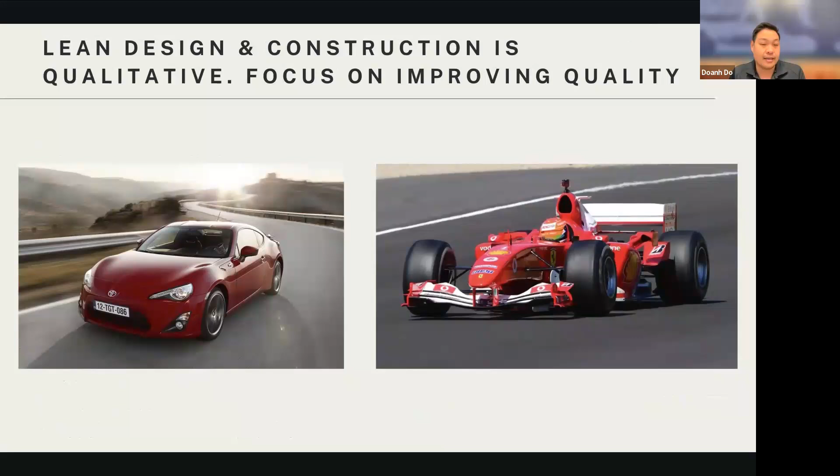And really, lean in the short term, people think it's quantitative, but really it's qualitative, because when you want to improve your car, you're not going to have more than 4 wheels, right? You're going to make slight improvements, and over time, those improvements will lead to a higher performing team and a higher performing project. And it's really about the quality over time, not just the quantity.

And we want to make this a habit, right? And so you're only going to be as good as your habits. And when you're deploying this the first time, I would start with one component at a time. Make it a habit before you add in more things together. So the most difficult part about last planner system is that you're going to a project halfway through, or you're in this construction phase and they're not using last planner system. What do you do to get the teams to apply it?

I would first create a stability for the project. Start with look aheads and daily huddles and constraint removal, just to create a stability for the first week, then the first month, then the first 3 months. And once you have a 3 month stability of the project, you can then start doing your phase planning and your master planning. So the goal is that in the very beginning, people are not going to do all this at once, and you can't get them to do this at once. You want to create stability first so that they see that this is going to improve their projects. And then you add in more and more components over time.

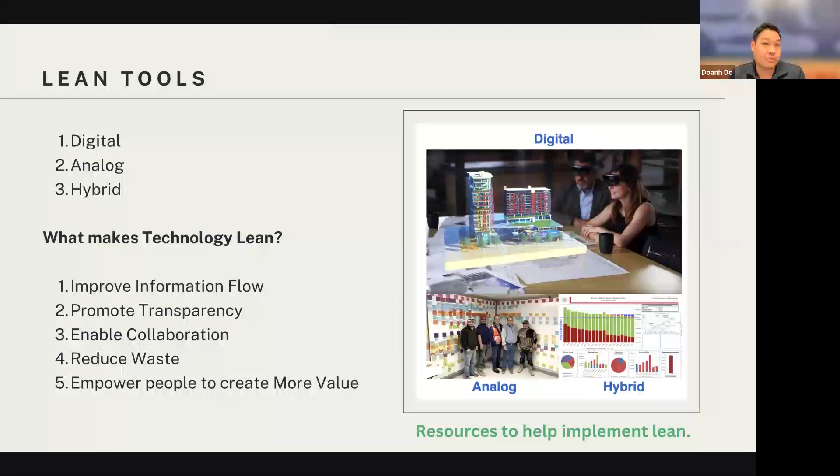So when you're actually applying lean in the project, you're not going to only be using stickies. We taught you stickies in the beginning because this is the analog version. This is the version that can be used on all projects. But in most projects nowadays, we're going to use digital, analog, and hybrid. And we have to use technology to help us, especially when the project is very big, has a lot of people, has a lot of activities, tens of thousands of activities. We can't just use sticky notes because once a sticky note falls down, we lose some information, right?

So realistically, what we see on projects is that the parts that should be analog should be the last planner, the master planning, and then phase planning. You have to get people in the room, put them on stickies and commit. But the parts that can be digital would be look ahead, make ready, weekly commitments, daily huddles. These things can be digital, and there's a lot of technology right now that you can choose.

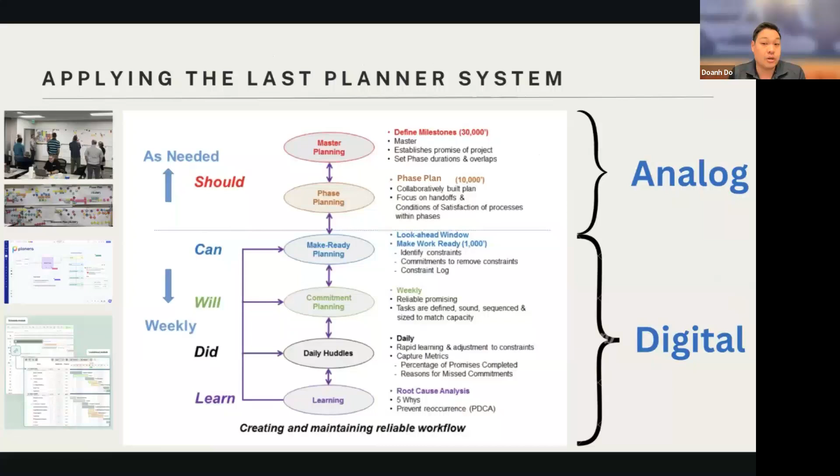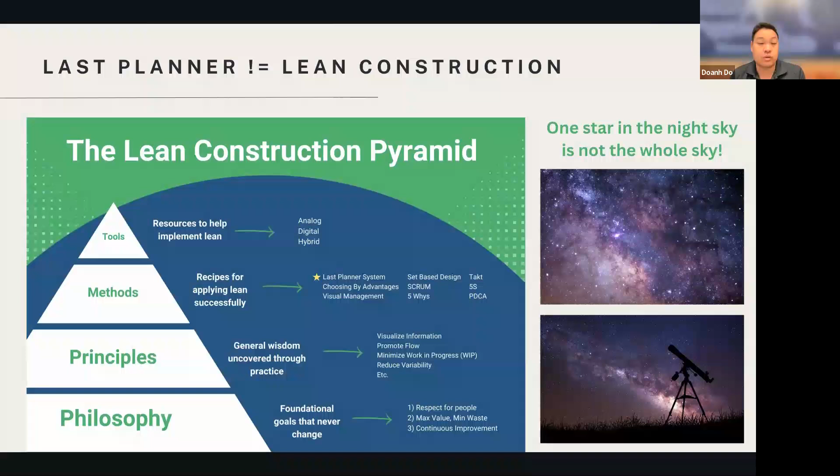And there's different ways of deploying lean. For last planner, most of it is going to be DIY. You can have internal coaching. Most companies and organizations should have an internal coach or a regional manager, someone experienced, right? You cannot have your lean manager be someone that just graduated from college. We've seen a lot of companies try this. It doesn't work. You have to have someone who actually has experience to coach the teams and to be able to do the assessment of the teams. Last planner system is something that most organizations need to have the skill of. You could have external, but you still have to have internal capabilities for your projects.

So this is where we are. We're at the end of the 2nd webinar. Next time we're going to talk about Takt, then TVD, then IPD and progressive design build, and then the history and development of lean construction. Over time, it gets more and more technical. This is the very first technical webinar. The first one was a more high level understanding about what lean is, the vocabulary, and what we would get if we apply this correctly. This is the first one where we went in depth and tried to explain how to do a method. In the next couple of webinars, we're going to be more technical as well. The content gets more technical, so that's why we build our foundations over time to understand these things.

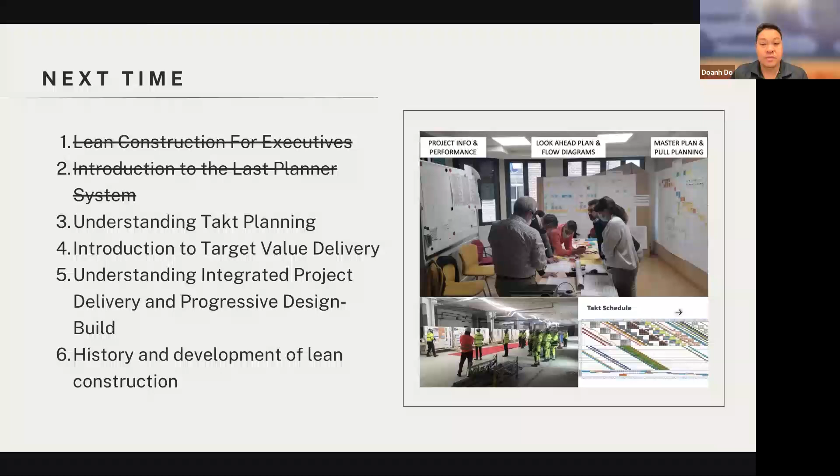But right now I want to go to questions and answers, and feel free to ask any questions. I think there's some questions in the chat box that we can go through. So I have some questions. I'm going to stop my share, then go through the questions.